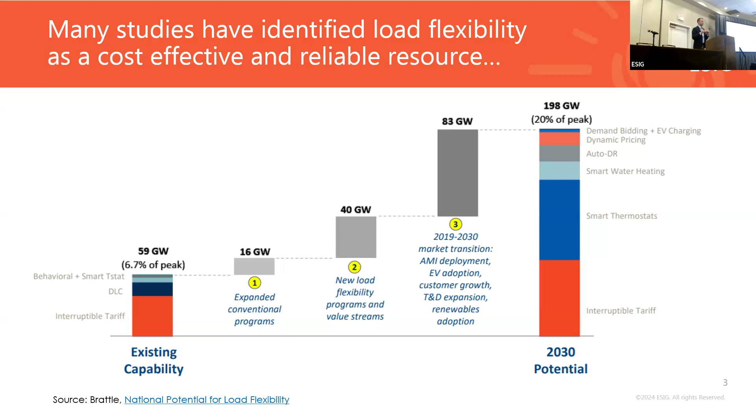And Akhilesh is coming next. I think Akhilesh, the Brattle team, others in the industry have done a lot of great work showing the potential or the economic potential for demand response or load flexibility more generally. So this is coming from Brattle's national potential for load flexibility. They showed a huge growth from 60 gigawatts up to potentially 200 of potential. And basically some of that's coming from expanded programs, but a lot of it's coming from potential new programs and then just new technologies that are inherently more flexible coming onto the system. So a lot of work in the space has shown this very large potential of the resource, right?

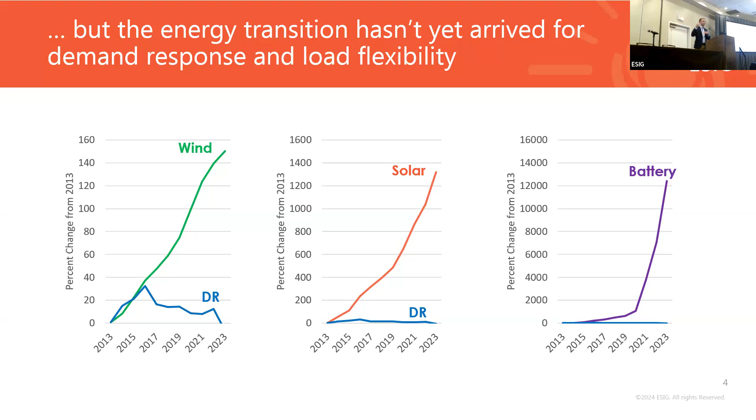But we're not seeing that really show up. And so this is some work from some of the EIA data forms. There's a lot of imperfect data around how much demand response is out there. That's a key issue that we've identified in the industry. But no matter how you look at it, you see the other technologies, what I would call the energy transition, whether it's wind, solar, or battery. This chart is just looking at percent change year over year, or cumulative over the last 10 years. And you can see rapid growth in wind, solar, batteries, and we are seeing very flat and even negative growth in demand response or load flexibility. And so why is it? There's this big potential. We're not seeing it show up in the marketplace, and what's going on?

So as part of an ESIG initiative, we put together interviews with over a dozen industry experts from aggregators, utilities, ISOs, researchers, and really wanted to understand, is there a gap? And if so, why is that happening? What are the barriers? And how can we overcome that? So we have a new report coming out very soon, hopefully in the next couple months here, maybe a month, that really goes through the top 5 gaps. And I wanted to start with this for this session to really identify these gaps. And as you listen to the next 4 folks on the panel, start to think, okay, do these gaps resonate? How might some of their experiences help solve some of these gaps?

The first, just around lack of experience and knowledge. I think a lot of people, you get in, people are throwing around terms like virtual power plant. Nobody really has a great definition of that. There's just lack of experience, I think, across the industry. I look back at where battery storage was maybe 10 years ago, where everybody knew the technology was there, but the experience across the industry, whether it's from regulators or in the utility or in the development community, just wasn't there. So I think a lot of great work for ESIG and others to do, get this word out there, get the case studies out there.

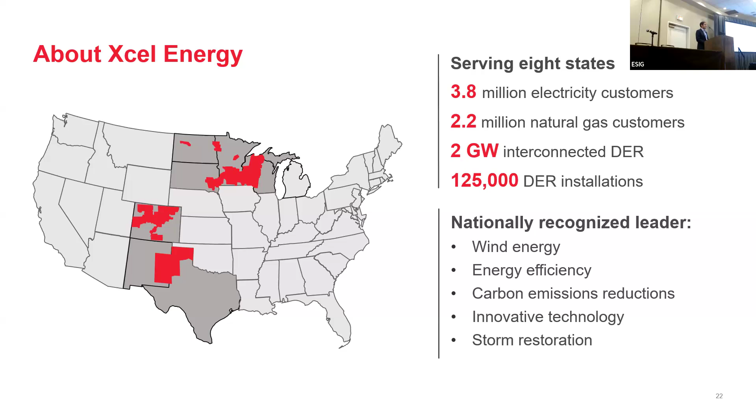And we credit ourselves with really being one of the leaders of leading the clean energy transition across all of our commodities. So we were one of the first energy providers to come out with a net zero goal across all of our commodities. What that means is 80% carbon reduction by 2030 from the power generation sector. We're well on the way to do that.

We're at about 55% carbon-free energy today, and that's largely through a combination of wind energy, nuclear, solar, et cetera, and distributed energy as well. And then we're trying to get to zero carbon by 2050. On the gas side, we're looking to be a net zero provider by 2050. There's a lot of challenges decarbonizing the gas sector.

We published what we consider to be one of the industry-leading plans in doing that in Colorado last year. So we're looking forward to seeing how our customers respond to that and start adopting measures that will help us decarbonize our gas business. And then finally, the last element of that is decarbonizing the transportation sector. So we want to have, by 2030, 1 in 5 vehicles be EVs in our state for all of our customers, and then have zero carbon fuel be accessible within 1 mile by 2050.

So I always think it's helpful to start with where we've been to understand where we're going. So I think I'm going to try to wrap up about 100 years of electric utility industry history in about 90 seconds here. But if you go back to really the 1930s and 1940s, we recognize as a country through the Rural Electrification Act that we need to go build out infrastructure because of the benefits and services that electricity provides to our customers.

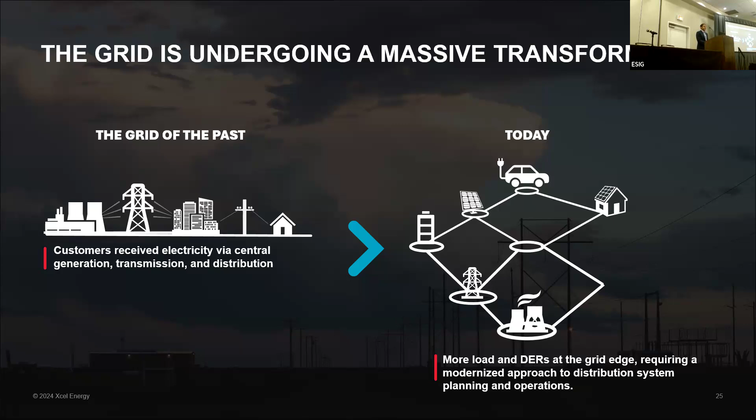In addition to that, we need to do a better job maximizing the use of our existing and new infrastructure as we put that steel on the ground. That comes down to a lot of the unsexy things like asset health and reliability programs, but that's going to be incredibly important as we deploy new capital, new infrastructure.

And finally, the last bit here is looking at ways that we can help defer, avoid, and reduce some of the need for that infrastructure, given the expected impact from a capital and ultimately a rate and affordability perspective for our customers. And that's where we really view load flexibility and some of the offshoots of that coming in as a critical piece of the equation here.

So pretty simple construct, but one that's somewhat beautiful in its simplicity, right? If you think about how we plan our system and make capital investments today, it's largely based upon the concept of a single peak demand. That can be an hour, it can be a group of hours, it may be by season. But generally what that results in is less than 60% of our assets are utilized to their full set of capabilities. And as I said earlier, in this period we're entering now with exponential load growth, that is going to drive a lot of capital investment that's not going to be able to be fully utilized if we continue down this existing paradigm today.

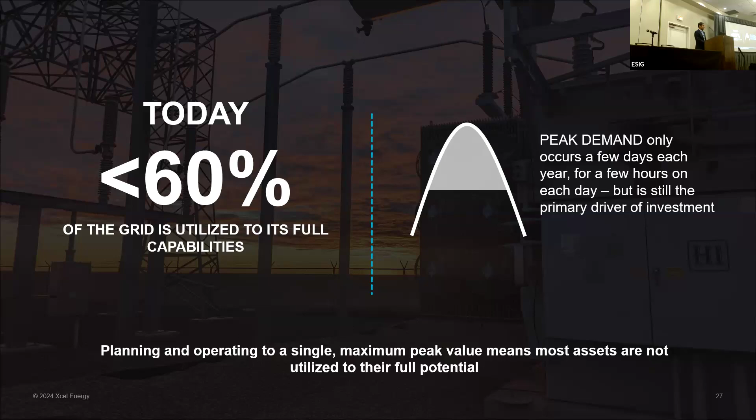So what does it look like to be able to do that from a load flexibility perspective? If you think about the traditional planning process today, as a planner, whether you're in transmission or distribution, you calculate your available hosting capacity or available connection capacity on the system. You allocate that based on static thermal limits or voltage limits that are based upon worst case scenarios. It's particularly true of distribution planning because historically we haven't had the visibility and the awareness at the edge of the system. And then you basically implement your physical and operational limits and put that steel on the ground, set it and forget it.

What that planning process could look like in the future as we start to get more visibility, more awareness, and potentially more control and communication out at the grid edge is moving more to a concept that's often referred to as a dynamic operating envelope. So rather than setting a piece of infrastructure based upon a deterministic planning scenario and a deterministic limit, what if you could actually in real time sample the grid to understand how DERs, how load may actually be impacting the system on a real-time basis? That opens up a world of opportunities in terms of the way that we plan and operate our system.

Now, it doesn't come without challenges. That's going to mean new things from an operational perspective, but it's a completely new paradigm that allows us to maximize the use of our system and our assets, ultimately a way that makes for more dynamic and more efficient use of the system.

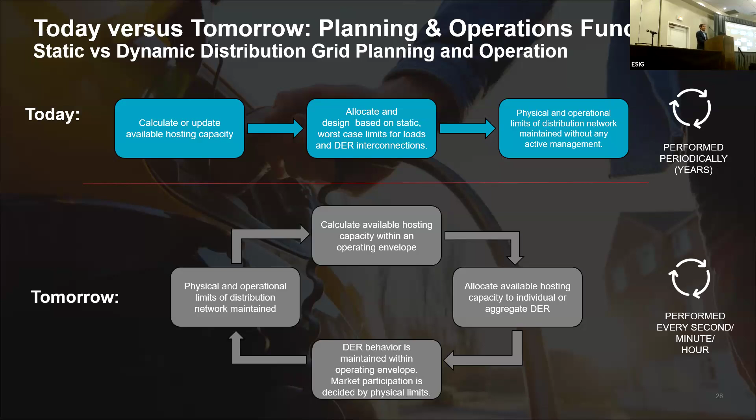So about a year ago, our chief planning officer, Alice Jackson, went to the vice president of our customer energy solutions team and said, I want you to go figure out a way to bring me 20% of our load being flexible in every hour of every day. I wasn't there for the conversation, but you can probably imagine what his reaction was. And after he picked his jaw off the floor, we started going down this path of what it would take to get there. So I'll hit a few of the things that we're starting to do at Xcel to help us go down this vision of getting us beyond being the leader that Akhilesh had been from a traditional DR perspective, and really thinking about load from a flexibility perspective on our system in a way that can provide new benefits.

So first and foremost, improving visibility. As I mentioned before, we've historically been blind to a lot of the system, particularly the distribution system. We're in the process of deploying the latest generation of smart meters that gives us enhanced granularity at the edge of our system. That data is becoming increasingly more valuable. It's also becoming increasingly more requested by users of that information. So part of what we're doing to enable this flexibility is bringing all that into a unified data platform so that it's accessible to our planning teams, our operation teams, our customer teams, et cetera.

Second piece of this is leveraging DERs as an asset. So if you think about historically how DERs have been deployed and incentivized on our system, they've largely benefited the direct participants of those assets. So in Colorado today, we have about 1 gigawatt of rooftop solar. That's all incentivized under traditional net metering. We need to be shifting that paradigm, whether it's through rate design or whether it's through control, through something like a DERMS, to be able to use those assets to provide value, not just to direct participants, but also the broader system at the bulk system level, as well as distribution.

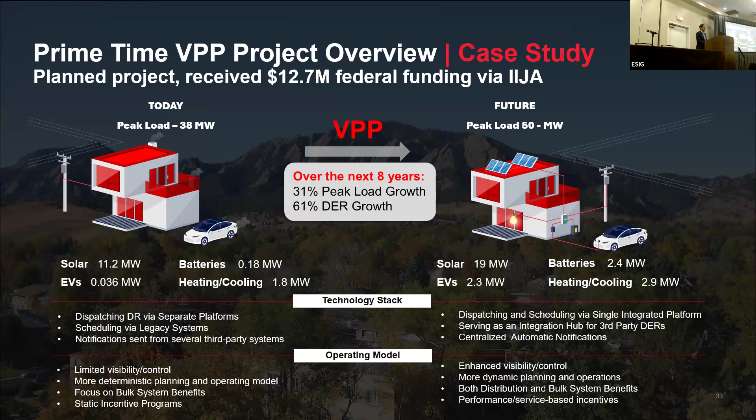So overall, we're expecting about a 31% load growth for the Boulder area, and then a 61% increase in DER. So, to the earlier comments, we absolutely have an interest in making sure as we bring additional DER into the system, it's done in a way that can support the broader community and our broader system as Xcel Energy.

I think that's my last slide.

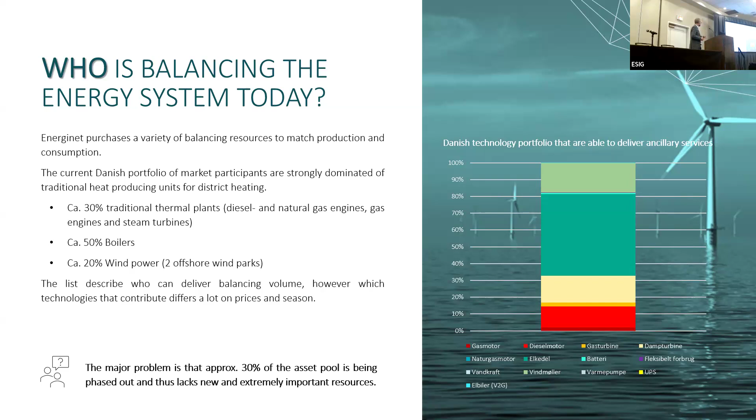And if I updated it with the latest numbers for the first half of 24, we would also see that solar is delivering a lot of our services. And especially our offshore wind parks are very important here, because it's a New England area, and offshore wind is being developed here. So they can really deliver a lot of very reliable ancillary services. So just one word on that.

So finally, we are looking into a large change in consumption, as is the case here in the US as well. A lot of it is from district heating, from data centers, and we also expect to see a lot of hydrogen being produced, because we have a lot of offshore wind that can produce this hydrogen. And we expect it to a large degree to be flexible. So when we say that half of our demand will be flexible, it is a lot of this new demand. And what I've learned during these days is that data centers can probably be to some degree flexible, because at the moment we assume they're not flexible, but data centers is something we really try to focus on. So I think that was my presentation. Thank you.

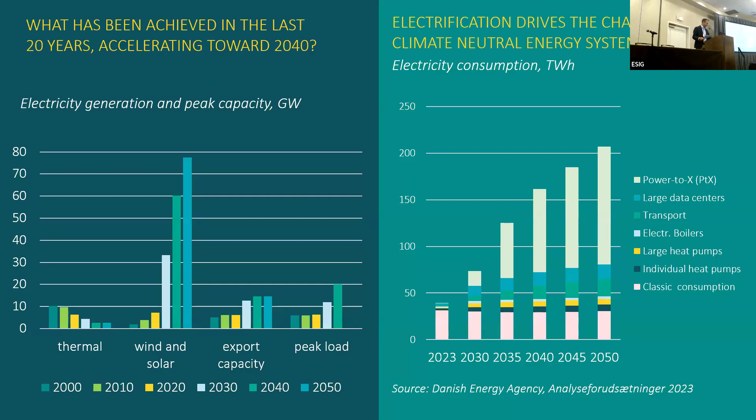Thank you, Peter. As they say, never let a good crisis go to waste. So at least we got some flexibility out of it. And Zach, you can now go back to your CEO and say, all you have to do is quadruple the price of electricity and then double it again with taxes. And turns out people... I have a question coming up about how frustrated people got during that.

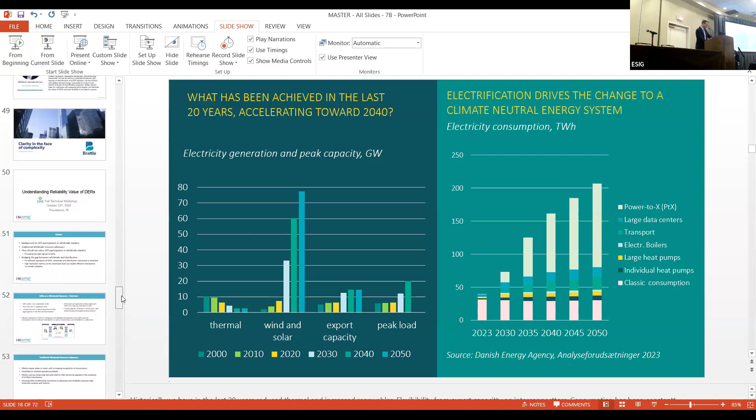So our next presentation is from Selin, and I really appreciate this one because I have to admit I had a little bit of FOMO not being in the resource adequacy session. What's great about this is you're combining the two together, a really great way to end it, talking about load flexibility and its resource adequacy or reliability contributions.

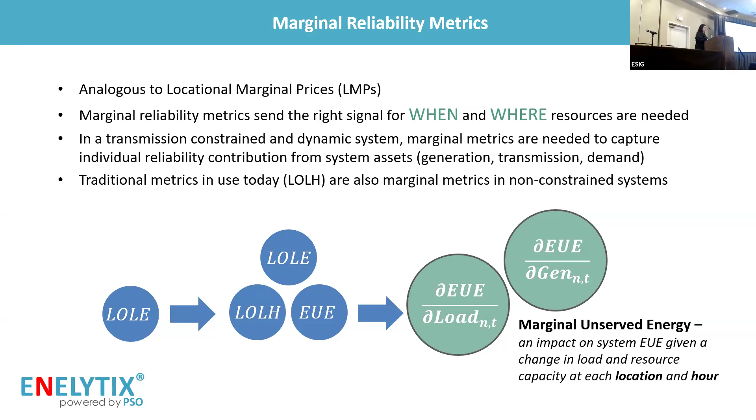So marginal metrics are being recognized by ISOs. There have been a lot of proposals and implementations. ISO New England has a marginal reliability impact metric. It's already being used in their capacity demand curves, but it's also proposed to be used as an accreditation mechanism. And other ISOs are also implementing similar methodologies.

So I'll illustrate what I mean by marginal reliability metrics in a very simple 3-bus, 3-hour system. We have this 3-bus system that is sufficient in terms of system level capacity and demand in every hour. But because of limited transmission between locations B and C, we observe a load shed in location B, right? So because of the local congestion, we can still see events happening.

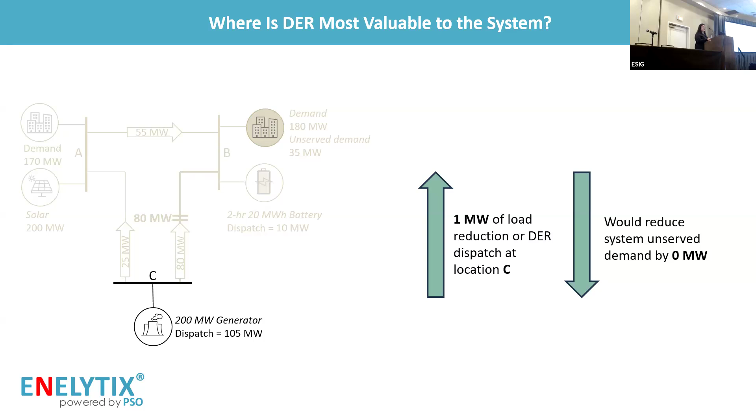But the question is, in a simple system like this, how do we measure where DER is most valuable to the system, right? If we focus on where the load shed is happening, location B, of course, adding 1 megawatt of injection at that location will reduce the system unserved energy by 1 megawatt, right? It's straightforward. If we focus on location C, where we have some thermal generator that still has some margin, 1 megawatt of dispatch at that location will not do anything for the system unserved energy because of limited transmission, right? It has no contribution.

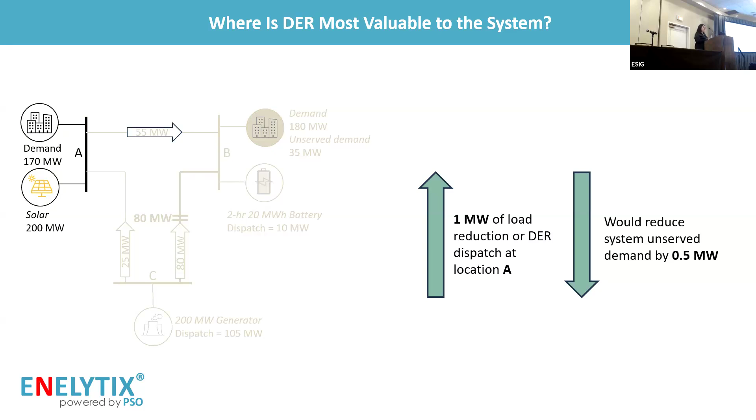If we think of location A, because of the counterflows, if we add a 1 megawatt dispatch there, it will reduce the unserved energy by 0.5 megawatt. But similarly, we can measure this for transmission assets as well. If we added 1 megawatt of capacity on this transmission line between location B and C, that would also reduce the system unserved energy by 1 megawatt, essentially the same reliability effect as load reduction in B, right?

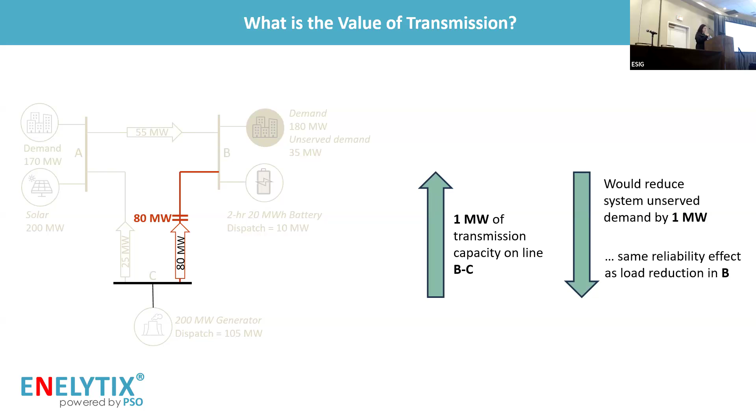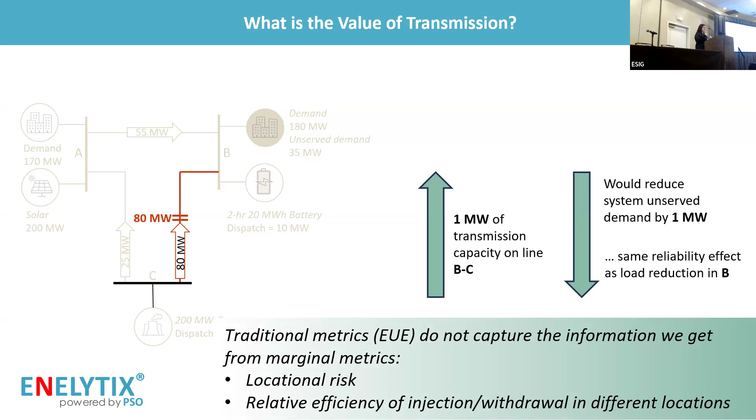So what I want to emphasize here is that this metric allows us to measure the relative efficiency of adding capacity or adding dispatch in different locations in the system, but also compare the value of transmission and the value of adding capacity in different locations. Right, so traditional metrics like unserved energy don't capture this information we get from the marginal metrics, the locational risk and the relative efficiency between locations and assets.

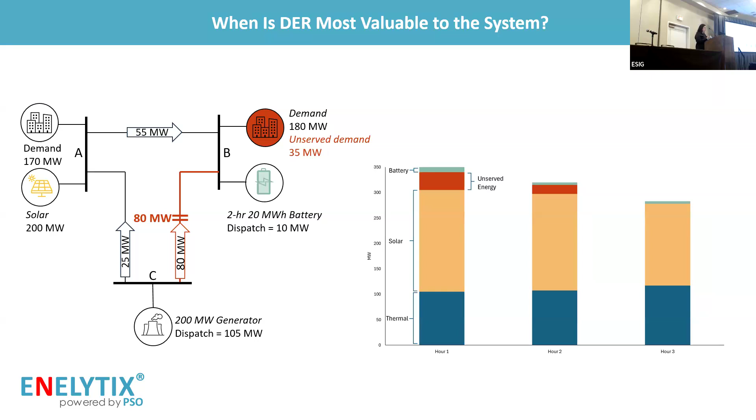Now going to the when aspect, right? When is DER most valuable to the system? So I'll go to this one that shows it in a more zoomed version. This is showing basically the 3-hour dispatch of the system. The thermal capacity we cannot move because of limited transmission. Solar we cannot move because it's generating at the maximum radiation anyways.

So in the first 2 hours, we have unserved energy, right? If you think of the marginal unserved energy, then of course it's going to be 1, right? Or if you add a dollar value to that, the prices are going to be set to value of lost load. We can think of it that way too. Hour 3, we have a battery dispatch, but we don't have any unserved energy event.

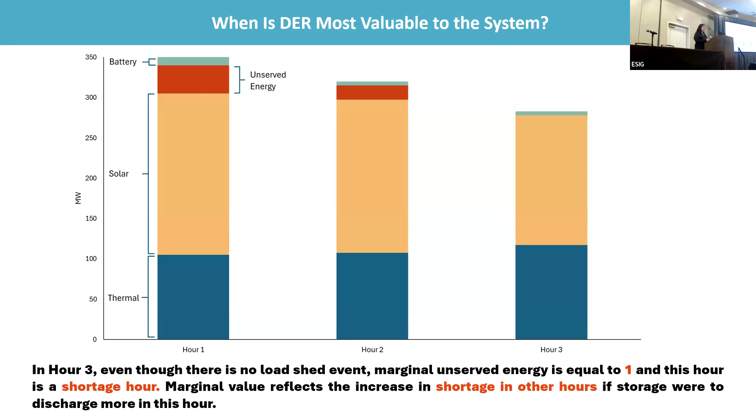But if you think of adding a 1 megawatt demand in that critical location to the system, that means the battery we have there is going to have to discharge 1 more megawatt. But what does that mean for other hours? That means in other hours now, we're going to have to discharge the battery less, right? Which means the decision that we make in the 3rd hour, even though we don't have an event at that hour, is going to impact or worsen the reliability events in the first 2 hours, right?

So because of that, the marginal unserved energy in the 3rd hour is also going to be reflecting the system risk, right? And again, if you think of the primal type of metrics like unserved energy, LOLE, they don't capture this intertemporal coupling.

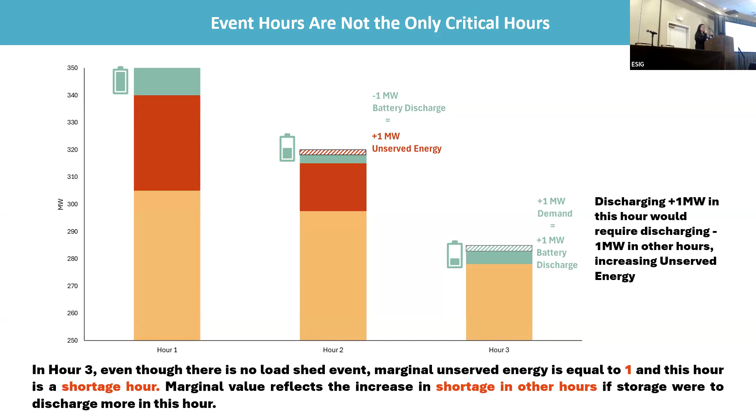So you might be thinking, great, Selin, you showed this on a 3-bus example. Can we do this for real size markets? Augmenting with probabilistic analysis, multiple weather years, weather scenarios, and multiple trajectories of system outages with operational details and transmission constraints that we talked about.

The answer is yes. Cloud computing is a big part of that, parallelizing the weather scenarios and the system outage scenarios. But also we use some scenario reduction techniques. We have a paper on this. I put the references here, as well as a prior ESIG presentation, I believe exactly a year ago. We went into more detail on how we do this efficiently.

But we have 2 examples. One is from MISO. We partnered with MISO on an ARPA-E project on nodal short-term resource adequacy. So the example I will show is a day-ahead operation and planning example with 100 short-term weather scenarios applied as a backcast simulation of Winter Storm Uri in 2021. Another one is ERCOT. We tried an annual planning type of adequacy analysis there, again nodal with operational details. They're just single weather scenario.

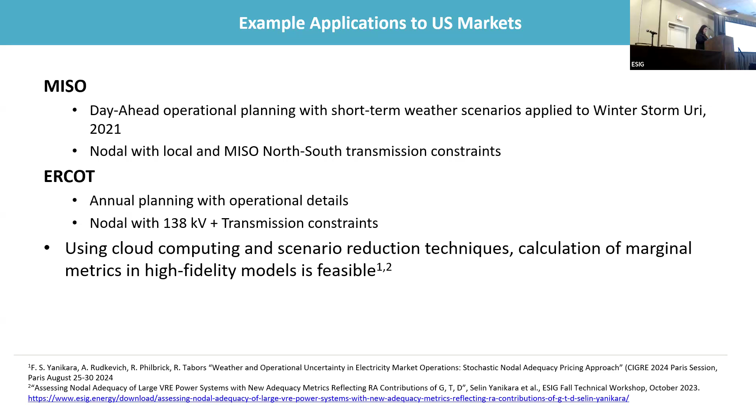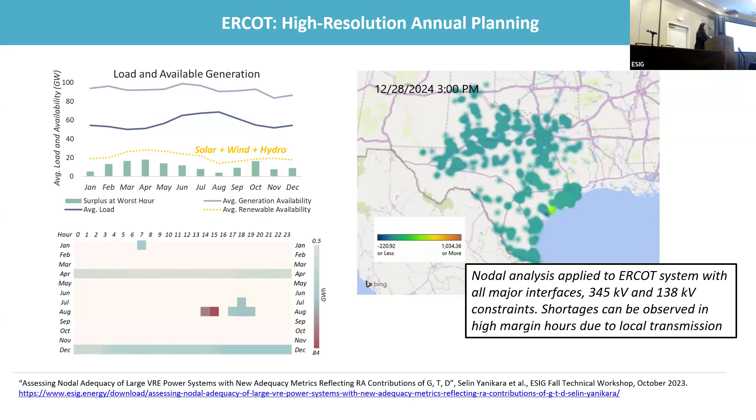And of course, a big part of this, when we think of DER participation in wholesale markets, is coordination between wholesale and distribution. There's going to be a lot of interactions there, but there's an opportunity to use the nodal level resolution that we can get from wholesale to precisely manage events and transmission congestion associated with these events, right? But of course, the distribution system has its distinct and separate criteria today to manage events. So how can the wholesale system use that to more efficiently manage the load shed events? So there are some questions there to address.

I don't necessarily know the answers, but I just wanted to pose these questions, and they're more directed to the distribution side. What are the criteria and policies that the distribution system uses that the wholesale system can factor in planning and operation? How can the distribution system benefit from these high resolution wholesale signals, both hourly and locationally? Is substation resolution sufficient for the aggregators? Maybe it's sufficient for some participation models. Do we need more granular signals within the distribution system, and what are the barriers to those?

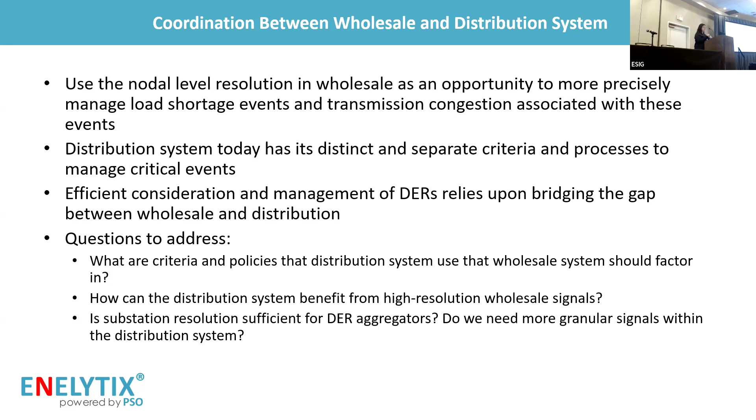We were brainstorming with a colleague from a utility, and this is sort of an example exchange of information that we can have between wholesale and distribution. So wholesale can provide this locational and hourly high resolution risk information to distribution, and perhaps the distribution side can use that during critical events, deciding where to put mobile generators, and how to manage DERs.

At the same time, the distribution system has its own feeder level characterizations, right? So shedding 1 megawatt of load from one substation versus another has differences for the transmission system because of congestion, of course, but it also has differences for the distribution system. Some feeders have a lot of critical loads, more DERs, environmental justice customers. Transformer status becomes very important on high heat days. So can the wholesale factor those in to make the load shed or event management decisions more efficient?

Can't see the time because I'm too short, but okay.